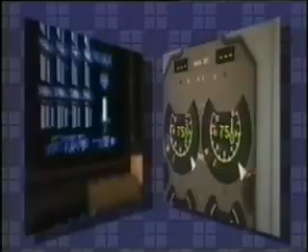The reliability of the gas turbine engine has reached a level where severe engine failure is so unlikely that most pilots will never experience one in their flying career. However, modern turbine engines can still fail, and when they fail, will there be a loud bang and high vibration, or will they just quietly decay to zero thrust?

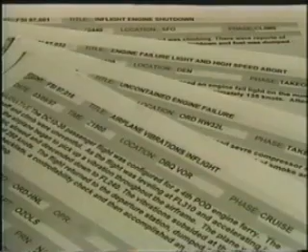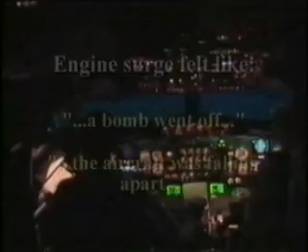It also appears that the greater the physical sensations the pilot feels during the malfunction, the greater the startle factor, and the greater the likelihood the flight crew will try to diagnose the problem immediately instead of flying the aircraft first. When flight crews are interviewed after engine malfunction events, such as the surge of a large high bypass engine during initial climb out, they make very similar comments regarding the event. Pilots will often report that it felt like a bomb went off, or that the aircraft was falling apart.

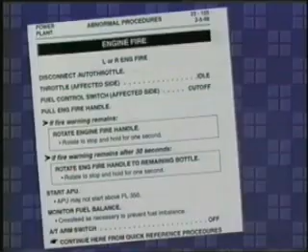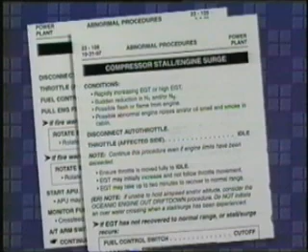Each time an event occurred, the sound and the feel of the event were different, and often much more intense than indicated by any training the crews had received. Because of this, the flight crew either did not recognize the engine symptom or was so concerned about the engine that they responded without taking time to correctly evaluate the situation. In each case, additional time spent in stabilizing the airplane's flight path before responding to the engine symptom would have avoided a serious event.

Remember, all transport category aircraft are designed and certified to be controllable with the most critical engine failed. Unlike early turboprops, turbofan-powered airplanes do not require immediate pilot action to the engine in the event of a single engine malfunction or failure. Once the flight path is stabilized, the engine malfunction may be safely identified and the appropriate checklists executed. Taking the time to stabilize the flight path may sometimes lead to further engine damage, but despite that, the airplane still has the capability of safe flight.

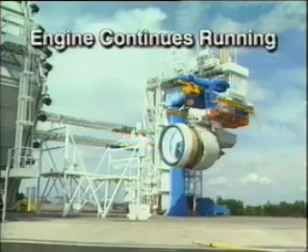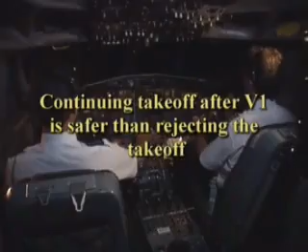Engines are tested during initial certification to demonstrate ruggedness following bird and ice ingestion. Even after a major failure, such as the loss of an entire fan blade, which is an extremely rare event, the engine shuts down safely and the airplane is still airworthy. Service history of fleet aircraft verifies that there are generally no engine failures requiring an instant engine shutdown in order to maintain airplane safety, and that continuing a takeoff after an engine failure at V1 is safer than rejecting the takeoff. So, the capability to recognize turbine engine malfunctions must be learned.

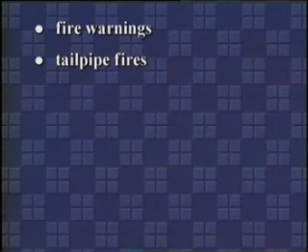But how? The objective of this video is to provide pilots with information to help them recognize and identify various engine malfunctions that have led to inappropriate crew responses and accidents in the past. These malfunctions include fire warnings, tailpipe fires, bird strikes, vibration, engine surge, severe engine damage, and slow power loss. In each case, the first priority is to employ the basic stick and rudder inputs necessary to maintain aerodynamic control of the aircraft. Remember, fly the airplane and then identify and respond to the engine malfunction when time permits.

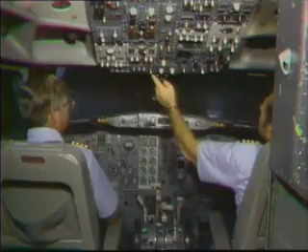Fire warnings result from excessively high temperature in the space between the engine casings and cowling, or from fire detection system malfunctions. The heat source may be an actual fire around the engine, an engine failure allowing core air to escape through a hole in the casings, or a leak of hot air from a bleed duct. Whenever a fire warning occurs, the first priority must be to fly the airplane. Once the airplane is stabilized, attention should then be directed toward execution of the appropriate checklist.

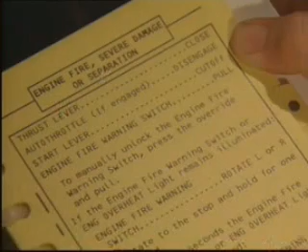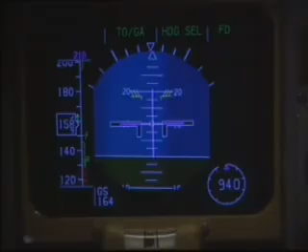Even if there is an actual fire, there is adequate isolation between the airplane structure and the nacelle to ensure sufficient time to establish and maintain airplane control to a safe altitude. Taking this time may cause further fire damage within the nacelle, but accident reports consistently show that flight path control must be focused on first, and it must remain a high priority until landing.

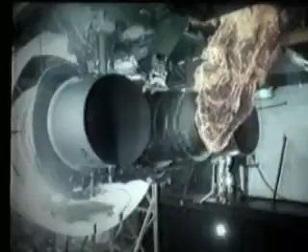Engine torching, or tailpipe fires, mostly occur during an abnormal engine start, but they may also occur after shutdown or during other ground operations. Although there may be no cockpit engine instrument indication, these events can be very spectacular when viewed from the ramp or cabin, and have been confused with an actual engine fire.

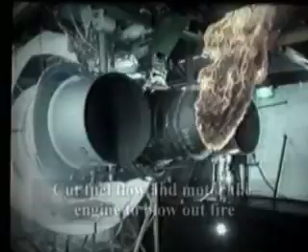The torching may be of short duration or it may last for several seconds. Note that the flame is confined to the tailpipe. Flames may turn upward and threaten the wing if no airflow is maintained through the engine, and in some cases, an EGT increase may be indicated on the flight deck. Simply cutting fuel flow while continuing to motor the engine normally extinguishes the flames.

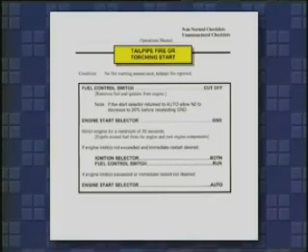The flight crew depends on ground personnel to identify engine torching. If you are told of an engine fire without any flight deck indications of a fire, follow the engine torching procedure as outlined in your flight manual. This procedure will direct you to motor the engine and extinguish the flames. The regular fire procedure will not.

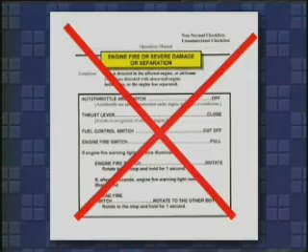Do not perform the engine fire procedure unless a fire warning indication occurs. Executing the regular fire procedure may disable bleed air to the engine starter and prevent you from being able to motor the engine to blow out the tailpipe fire.

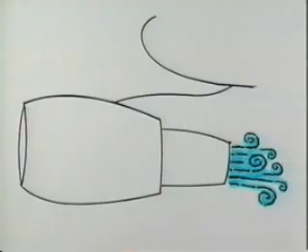There have been cases where flight attendants or passengers have initiated evacuations due to engine torching. These unnecessary evacuations can be minimized by prompt flight deck and cabin crew coordination to provide passengers with pertinent information and to alleviate their concerns.

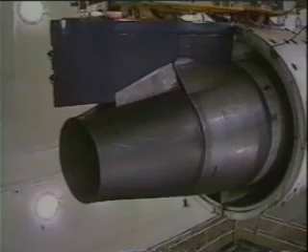Bird strike is a concern for every pilot. The birds may be observed by the flight crew, or the first indication of a bird ingestion may be an engine surge. Flocking birds are a particular concern since they can affect more than one engine. It may be difficult to see the birds and to know how many engines have ingested birds.

V1, rotate. Birds. I check the birds. Come on, baby, keep flying. Keep going now. Keep flying. Positive rate. Yeah. Come on, baby, that's it. Nice job. Fly the airplane. There's 400 feet. Okay, what's the problem?

Most bird strikes occur close to the ground, at the very time when there is least opportunity to appraise the situation. Nevertheless, the record shows that establishing flight path control first before taking action on the engine is a more successful strategy than taking immediate action with the engine.

There have been accidents resulting from bird strike-related rejected takeoffs above V1 speed, and in each case, the airplane was in fact safe to fly. Therefore, rejecting a takeoff due to a bird strike at speeds above V1 is not considered to be appropriate.

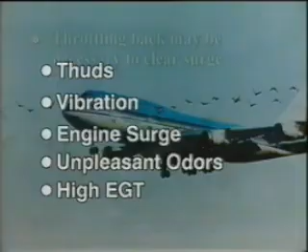Bird ingestion by an engine may be accompanied by audible thuds, vibration, engine surge, unpleasant odors, and abnormal engine instrument readings such as high EGT. Throttling back an engine may be needed to clear a stall after the airplane has been placed on a stable flight path. If the engine involved cannot be positively identified, do not shut it down.

In the unlikely event of multiple engines surging, prompt action may be required to clear the stall on the engines one at a time to assure that some power is available later.

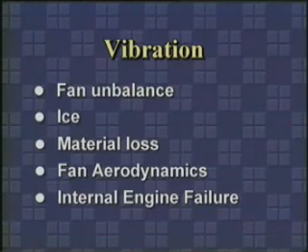Engine vibration may be caused by a fan unbalance. This can come from ice buildup. It may also come from fan blade material loss or aerodynamic excitation from blade distortion due to foreign object damage. Vibration can also come from internal engine failure such as a bearing failure. Cross-reference of all engine parameters will help to establish whether an engine failure actually exists.

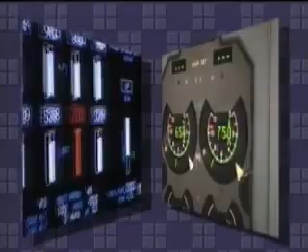Engine-induced vibration felt on the flight deck may not be indicated on instruments. For some engine failures, severe vibration may be experienced after the engine has been shut down to the point where instruments are difficult to read.

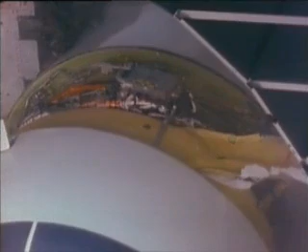This vibration is caused by the unbalanced fan, windmilling at an engine speed close to an airframe's natural frequency, which amplifies the vibration. Changing airspeed and/or altitude will change the fan windmill speed, and an airplane's speed may be found where there will be much less vibration. There is no risk of an airplane structural failure due to vibratory engine loads during this windmilling action.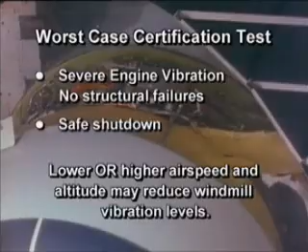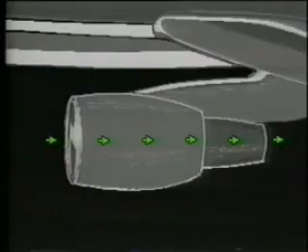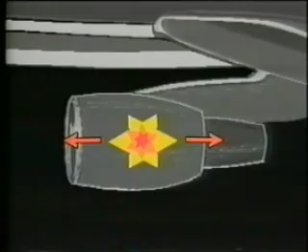From a flight crew member's perspective, one of the most startling events is the engine surge or stall on takeoff or during flight. An engine surge is, in the simplest terms, the breakdown of the airflow in a turbine engine. When the compressor blades stall, they are no longer able to force the air through the engine from front to rear. Now the high-pressure air in the middle of the engine can escape explosively from front and back simultaneously. Usually there are visible flames from both ends of the engine, accompanied with one or more very loud bangs.

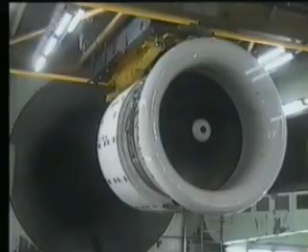This violent airflow reversal will produce an instant loss of thrust and an immediate yaw that will literally spill most of the coffee from your cup. This yaw is accompanied by a vibration that cannot be duplicated in the simulator. Bird strikes, internal engine failures, engine pneumatic bleed malfunctions, or internal engine clearance changes can cause a surge. It is usually a problem in the compressor system and so is often referred to as a compressor surge or

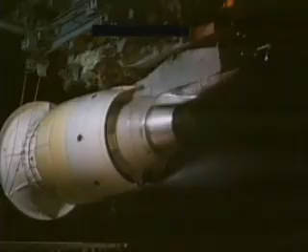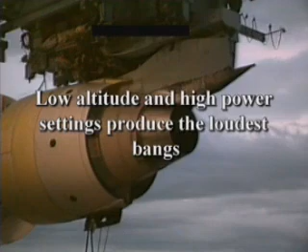compressor stall. The magnitude of the symptoms, such as the loudness of the noise and the severity of the vibration, vary with the power setting and the type of instability in the compression system. Low altitude and high power settings produce the loudest bangs and the most violent yaw and vibration. High altitude surges are frequently associated with engine power changes during leveling off or when initiating an altitude change. High altitude surges generally result in a muffled noise, light vibration, and increasing EGT, and may require power reduction to

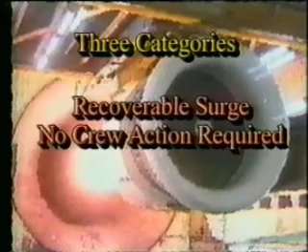clear the condition. Some surges allow the engine to recover with no flight crew action. Others recover after flight crew action to reduce power. The most severe surges are non-recoverable. When the engine recovers by itself, it is best to just fly the airplane and not interfere with the engine. Identification of a recoverable compressor surge or stall condition based on engine parameter fluctuations or changes alone can be difficult, due in part to the fact that the event is usually over in the blink of an eye.

Generally, most flight crews identify the condition as an engine malfunction when the EGT exceeds its limits or the EGT gauge turns red. If EGT continues to rise following a surge, the thrust lever should be retarded to allow the engine to recover. Then, after the engine recovers, power should be reapplied slowly. If the engine does not stall again when the power lever is re-advanced, the power can be left high. If the engine stalls again with the reapplication of power lever input, the power setting may need to be left at a lower power or idle condition. Continue to fly the airplane to ensure the indications return to normal.

If the engine does not recover or the EGT remains out of limits, then a shutdown of the engine may be the logical choice depending on the operational situation. Your flight manual and checklists identify the specific procedures to follow. Remember that an engine at idle still provides power for airplane systems and creates less drag than if shut down.

There have been numerous occasions where a high-power compressor surge has occurred during the takeoff roll or initial climb out, and the flight crew was notified by the tower that an engine was on fire. As a result, the flight crews accomplished the engine fire checklist and shut down the engine, even though there was no fire warning annunciated in the cockpit. The tower saw fire out the inlet and tailpipe, and their information regarding seeing flames outside the engine was correct, but an engine shutdown was not necessary since this was not actually an aircraft fire.

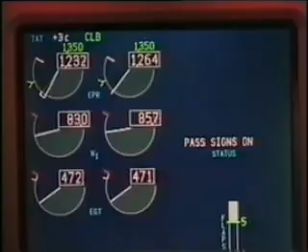Recent interviews with pilots who have experienced high-power compressor surge malfunctions during takeoff and initial climb have revealed that they have initially thought that a bomb had exploded, or that they hit a truck, or had a mid-air collision. Remember, no matter how loud the bang, airplane control is always the first priority.

In the event of a major internal engine failure resulting in severe engine damage, there may be a variety of symptoms on the flight deck. Fire warnings, engine surge, vibration, high EGT, fluctuating RPM, oil system parameters out of limits, and thrust loss.

Any one of these symptoms alone could be from a more benign malfunction, but multiple symptoms are a good indication of severe engine damage, and visual inspection by the cabin crew can be very helpful in confirming this. Visual symptoms may include flames, smoke, or visual damage to engine cowlings.

It may not be possible to distinguish initially between an engine surge without damage and one accompanying severe damage. The symptoms of the two kinds of events can be very similar, and from an operational standpoint, it is not important to know immediately which of the two has occurred. If it does become necessary to shut down the engine, wait until you positively identify the engine you select as actually being the malfunctioning engine.

It should be noted that even an engine which may show signs of visible damage and visible flames may very well be producing useful power necessary for initial climb out. Again, the first priority is to fly the airplane, not the engine. After you have positive control of the aircraft's flight path, then identify and secure the affected engine when time permits. Diagnosis of exactly what caused the engine problem is neither necessary nor safe if it diverts resources from flying the airplane.

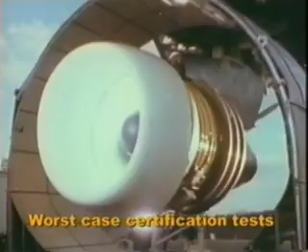The malfunctions discussed so far have compelling cues, such as loud bangs, vibration, and warning or advisory messages. In each case, the challenge is to fly the airplane without being distracted by very compelling or alarming engine symptoms. The last type of malfunction to be discussed here is more subtle: slow decay of thrust, or non-response to power lever. These can be subtle in fact to the point that it can be completely overlooked, with potentially serious consequences to the airplane. If an engine slowly reduces power, or when the thrust lever is moved the engine does not respond, then the airplane will experience asymmetric thrust.

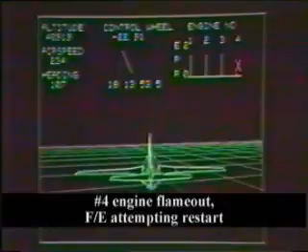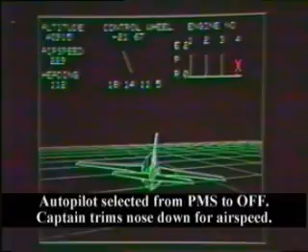The problems will most likely develop at a point during the flight when the autopilot is engaged. The autopilot will compensate for the asymmetrical thrust on its own. It takes an alert flight crew to recognize the situation that's developing. If the airplane is badly mistrimmed when the autopilot is manually disconnected, or when the autopilot reaches the limits of its authority and automatically disconnects, only seconds remain before an unusual attitude is encountered.

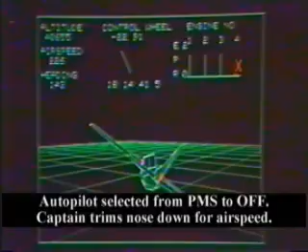If no external visual references are available, such as flying over the water at night or in IMC, the likelihood of an upset increases. This condition of low-power engine loss with the autopilot on has caused several aircraft upsets, which were not always recoverable. Flight control displacement or trim input indicators may be the only obvious indication that the autopilot is trimming the aircraft away from coordinated flight.

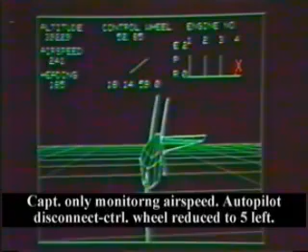Vigilance is required to detect these stealthy engine malfunctions and to maintain a safe flight attitude while the situation is still recoverable. But a slowly changing asymmetric thrust problem is not an easy one to detect. Symptoms may include multiple system problems such as generators dropping offline, low engine oil pressure, unexplained airplane attitude changes, significant differences between primary parameters from one engine to the next.

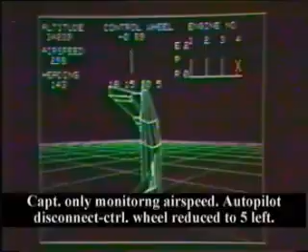If asymmetric thrust is suspected, the pilot must be prepared to make immediate rudder or trim inputs to avoid an uncommanded aircraft roll. The first response must be to make the appropriate rudder input or trim adjustment. Disconnecting the autopilot without appropriate control input or trim adjustments may result in a rapid roll maneuver.

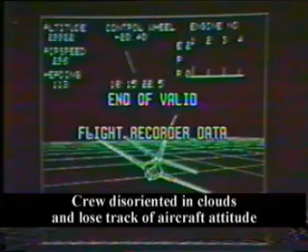Different aircraft from different airframe manufacturers display different types of indicators to the pilot regarding the amount of trim the autopilot may be adding to the system. Consult your flight manual and training department to gain a full understanding of how your particular aircraft provides visual, audible, or tactile indications of the amount of trim being added by the autopilot.

The sequence of events and severity of symptoms experienced during an engine malfunction may vary from the events shown in this video and from those experienced in a simulator. Engine malfunctions vary from one event to the next. The failures shown here were selected as relatively severe, but not the most severe that have ever occurred. Simulation of failures may be limited by simulator capability, which may not permit realistic levels of noise and vibration symptoms. Industry is currently addressing these concerns to enhance the simulation realism for such failures.

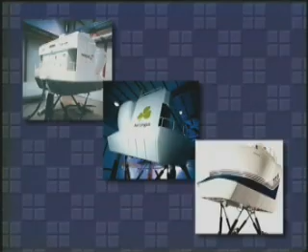This video is intended to provide general information on the characteristics of some high bypass engine failures and malfunctions. It is not intended to be an in-depth study of all possible engine failure modes. Specific remedial action to be taken in the event of an engine failure is published in the Airplane Flight or Operating Manual.